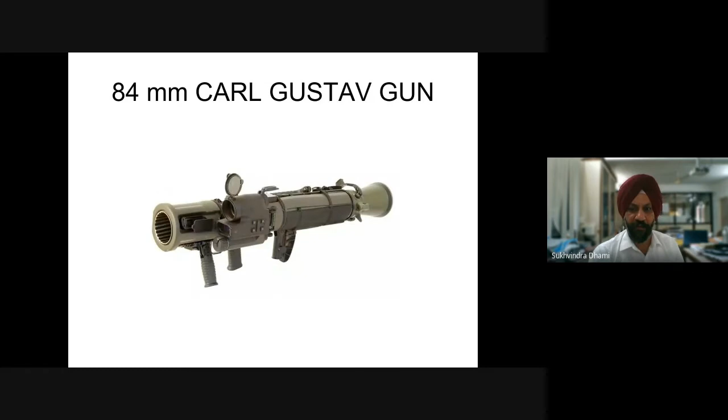In this gun's ammunition round, there is a piezo element within the fuse. This piezo element was actually being imported. The sensor element was typically of Matsushita, Japan origin at that time, mid-60s, and some material would be coming from Russian origin. So the seed of indigenization, of making this material in India, came from the specific need for using it in this product.

Once the need arose, you dream about making the materials. My father started working on a material called lead zirconate titanate. It's a bit complex, but in short form, lead is P, zirconate is Z, and titanate is T, called PZT. PZT was just introduced in the world in the late 50s. My father did a lot of pioneering work, keeping only a 10 to 15 year lag behind when these materials were already developed elsewhere.

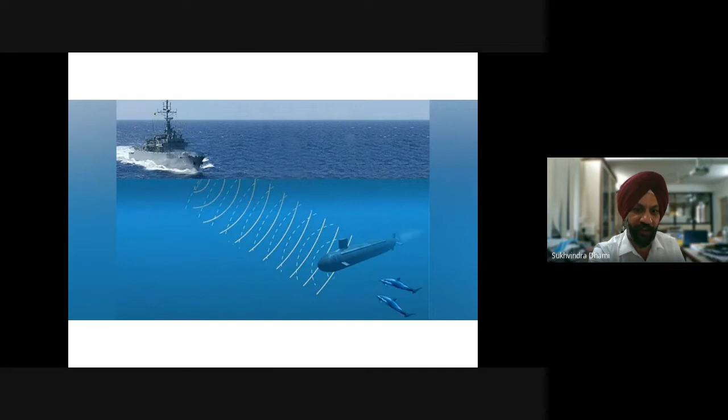So on the ship there is a sonar, it will send out the waves, and it reflects from the enemy submarine and the ship is picking it up. And from signal analysis you can come to know if this is an enemy submarine, or which type of thing it is, and how far it is located away.

So whatever sensors were being made for the Indian Navy were principally of Russian origin. So they also gave this project to ARD, saying you should indigenize making these materials for the Indian Navy. So the Navy's research body, the one which makes the entire sensor, is called Naval Physical Oceanographic Laboratory at Cochin. And then they took out all the samples asking can you make the product.

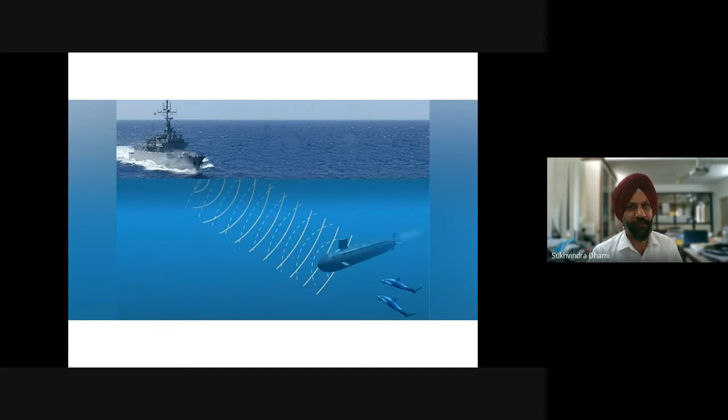I think within 2 to 3 years, these materials were also developed and successfully introduced in the Navy. But despite that, the production of the items were not coming to a production level because it was a government laboratory. So in 91, in 93, my father took premature retirement.

Sparkler was established in the year 1990 and my father took premature retirement in 1993. At Sparkler, we were doing multiple products, of which piezo was one of the products we started in 1995.

And we started producing these materials for various applications, of course for the Navy and also for defense armament, for anti-tank ammunition, we started producing the materials in production quantities and supplying to them. But still the Navy was importing because the sensor assemblies would come from Russia, and the sensor integrating establishment is Bharat Electronics Bangalore.

So we started giving them samples, they started working on indigenizing the sensor. But still no one was taking a decision that we will go 100% indigenous, they would continue to import. But what happened in 1998, when India did the second Pokhran blast, a lot of these sensor imports came under embargo and the countries denied the sensor technology because they had defense applications.

Now this became a boon to our company because our products were already approved, but decisions were not being taken to use the Indian products into the system. Now with the Pokhran blast, our products, they started using on a large scale and introducing it into the Indian Navy for underwater applications.

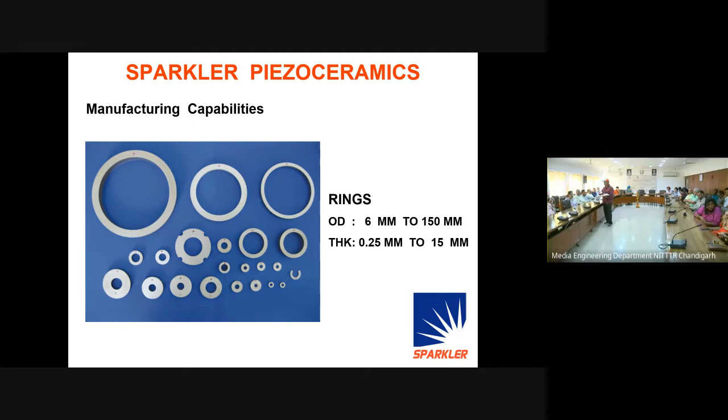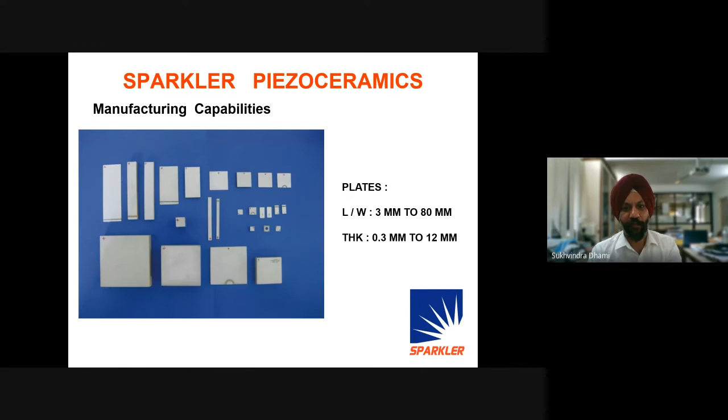Roughly the materials we make come in various shapes. This is what the sensor element will look like. It could be a ring shape, various shapes and sizes. These are some applications, I'll come back to that. We also make disc shapes in various sizes - this we call the sensor element. And cylindrical shapes, hemispherical shapes, dome shapes, and assembled hollow balls.

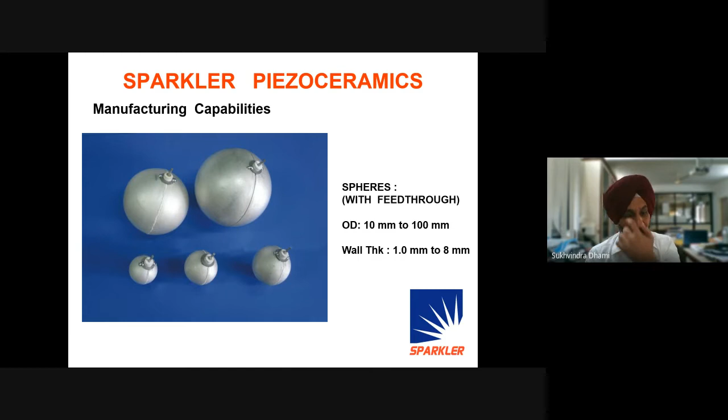This we are also exporting to Russia. The Russians have substituted their materials with Indian material, but we don't have the exact details because our customer, who is our distributor based in Russia, where exactly he is supplying further and how he is supplying, we do not know the details. But we are quite sure it is going into defense applications - Russians are using our materials there.

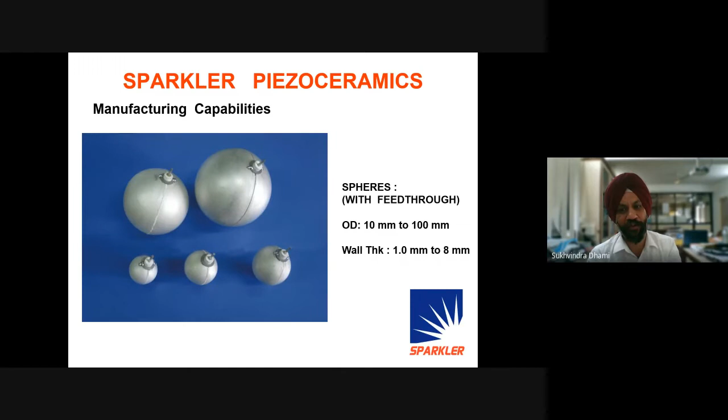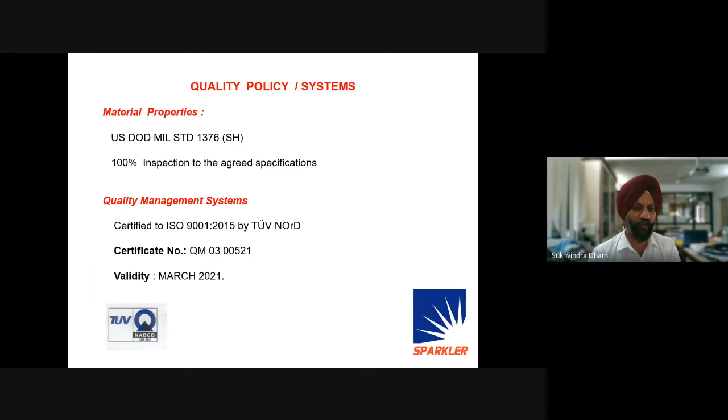Of course, our quality system is now to the US DoD mil standard, and we are also aerospace certified now. These are our quality management systems. Our manufacturing capacity is currently 1,000 kilograms and may be going up to 2,000 kilograms per month. That's about 24 tons per year.

Sparkler participates in a lot of exhibitions. In fact, we are going to Ceramic Expo USA towards August end, and we will be participating in Electronica in Munich, Germany. The objective of Sparkler going to these exhibitions is that there is a company, Sparkler Ceramics, that can make these materials in India.

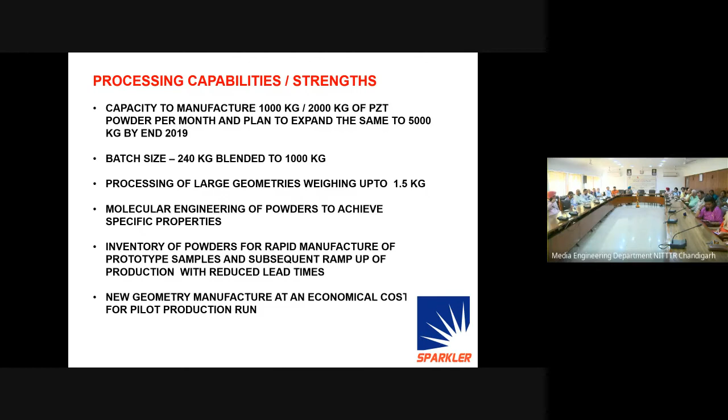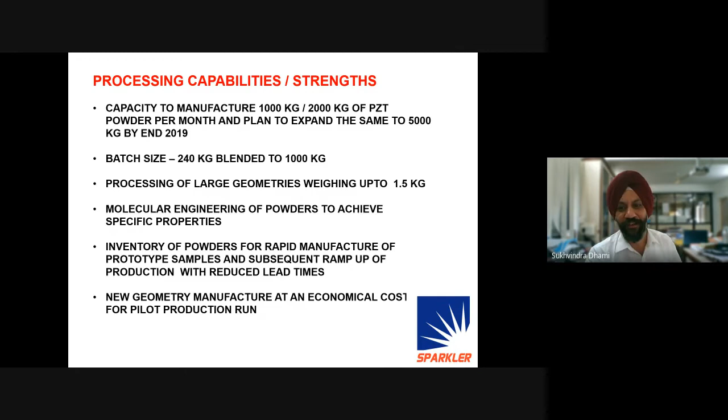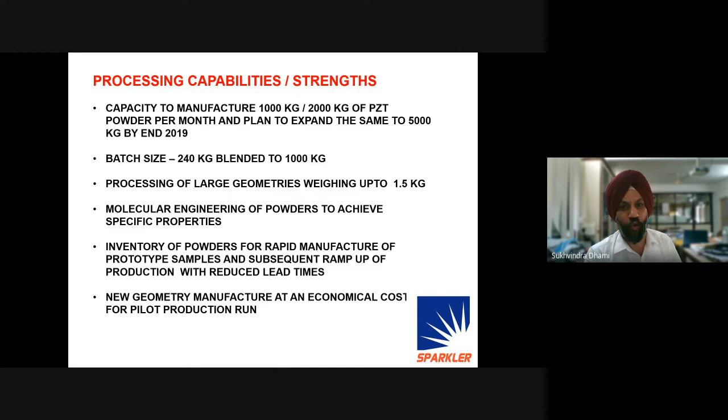And if you see the self-reliance story, Mahatma Gandhi also started this when he said we should make khadi at home, and the charkha started. So the concept of self-reliance - I always tell my team that you should build the product with strength. Sparkler Ceramic should be seen globally from the point of view of strength, and once we have the strength, we will get the respect. There will be foreign manufacturers who will say that we want to tie up with you and partner with you. That is my global vision - that ultimately the foreign suppliers may want to set up base, shake hands with us, and we can do some joint ventures in due course of time.

So currently, our manufacturing is from a new facility almost measuring about 2 acres, and we are ready to increase our production should the market expand and we add more customers to it. We have got a class 10,000 clean room, and a lot of facilities - these are some of the facilities which we have.

And we are currently working on very key projects for the Navy, for flank array for submarines, for the nuclear submarine. A lot of the project details I can't share with you, but we are the principal supplier of these sensor elements, and it feels really satisfying that we have been able to give production scale quantities at an economical price in a time bound manner.

See, one happens, you make the product, you made in India, but are you competitive? We can make these materials, but if it is so costly that the customer will not pay you, it's not of any use. You made a product, but you cannot sell it because your manufacturing cost is very high. So both things are very important in the self-reliance journey. In due course of time, if you want to sell your product in the global market, you have to be globally competitive.

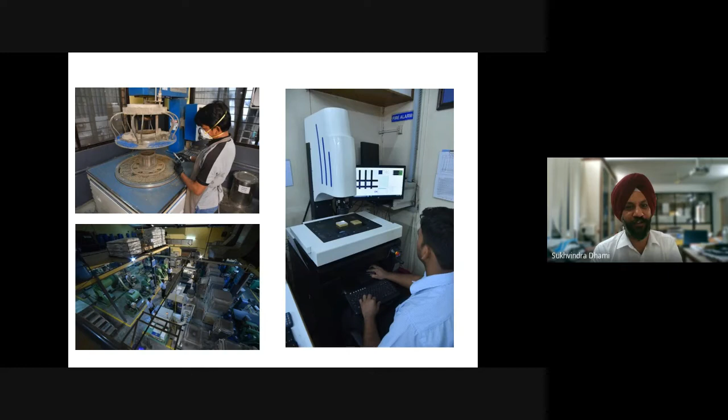So this is a quote I like, the Jonathan Livingston Seagull quote: the gull sees the furthest who flies the highest. So in this indigenization journey, or journey of self-reliance, first we have to think it in the mind, we have to dream it, then we have to live the dream, and we have to be able to see from far and start working in that direction.

Now, today I may be feeling very happy, but when my father started the journey, I joined in '91 in Sparkler. It took me about 20 years to understand the complexity of the technology. And after my father passed away, unfortunately in 2011, I've been handling it and managed to build on the base and increase production and understand the complexities of production further.

And my vision is to take Sparkler Ceramics to a global scale. And we are headed in that direction. Of course, if we have the right thing and the right team, we'll be able to do wonders. So with these words, thank you.